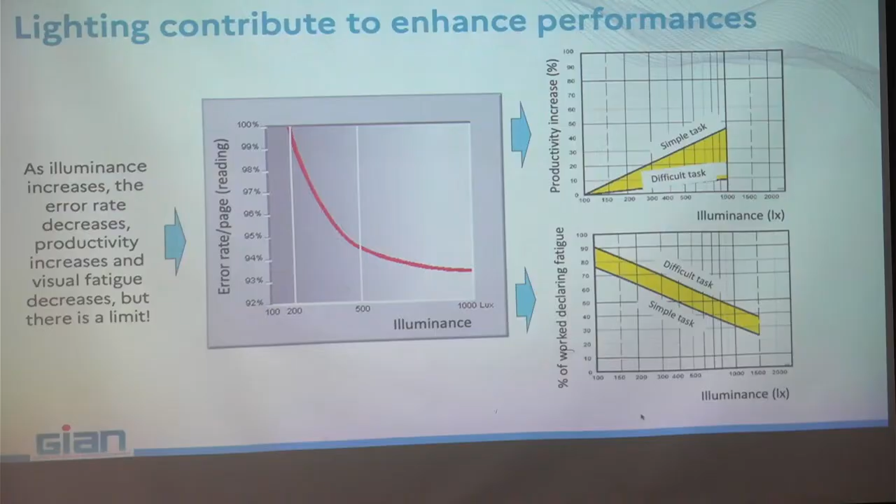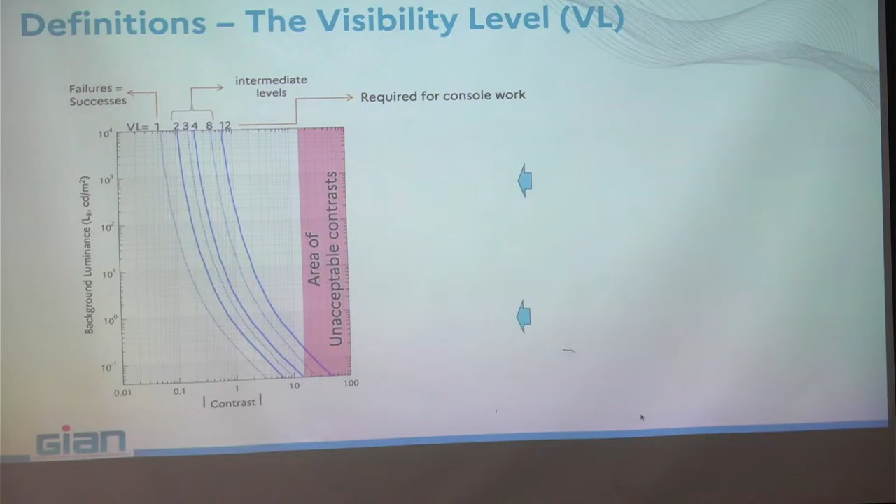And here I will explain something that most probably all of you know, but in an experimental way. To explain our visual performance, we have a metric which is the visibility level, VL, and this visibility level has been studied by the CIE, the International Commission on Illumination, and they define 12 visibility levels from 1 to 12. When you are in visibility level 1, what is your task? For every trial, you have a 50% failure rate. Of two trials, one is false. Okay? This is the real minimum.

And 12 is a very high level. The error rate is very small, less than 1%. And this one, level 12, is required when you are working with a computer or with screens. You will understand why. And you see that these levels depend on the contrast and the background luminance. Okay? It is globally not advised to have a contrast higher than 10. This is logarithmic. If you have contrast higher than 10, then all the objects with that contrast will be dominant. You will see only that.

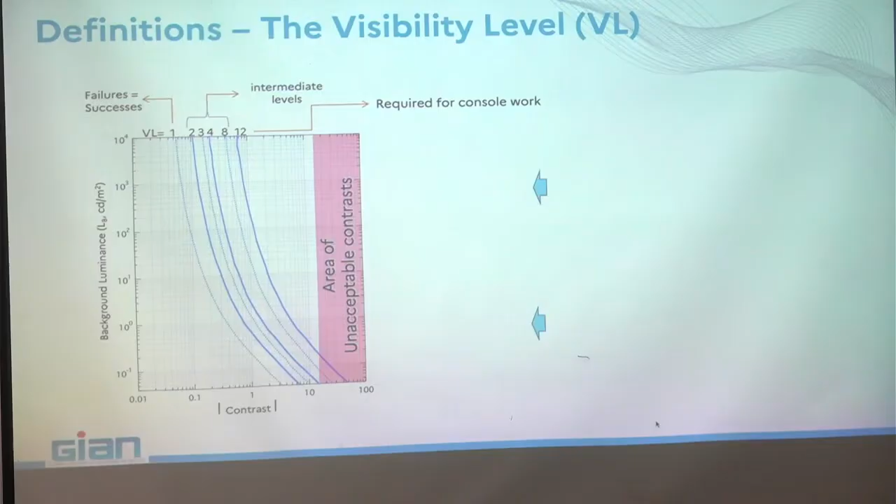Here, the screen is rather bright, but is not so bright as to be dominant. But if I look at the lamp, here the contrast between the lamp and the roof makes the lamp dominant. My eye will look automatically at the lamp, not the roof.

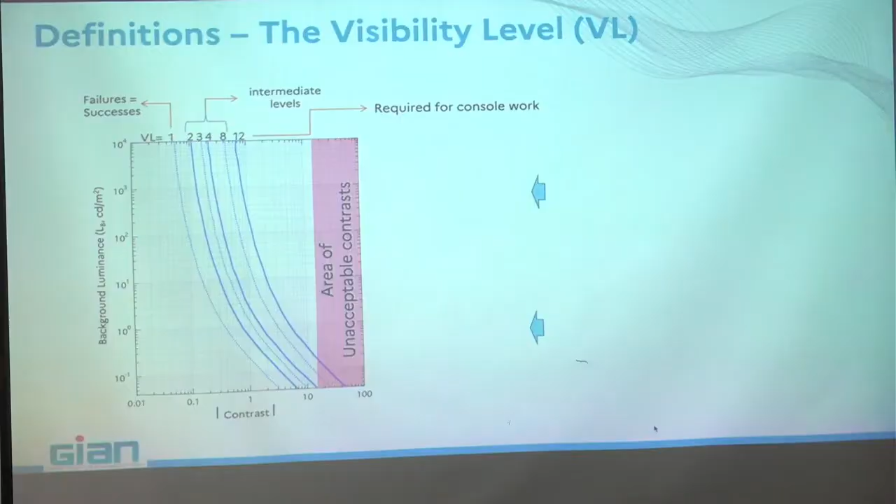And now look here, when you are performing a task, there are two options. One is that one, passive visual task. That means you read a book, for example, and what happens in the book, what is the contrast? The contrast is the printed characters with a given ink on top of a paper with a given reflection coefficient. That means the reflection coefficient of the detail and the paper is fixed by the manufacturer, not by you. That means the contrast is fixed whatever the illuminance or luminance level. Okay? And look here what happens. For this task, the contrast is fixed.

For any luminance, that means what? If you are in a very bad reading condition, say you are somewhere here, reading at a visibility level less than 1, how can you enhance the visibility level? You just light up your book more. You know that effect.

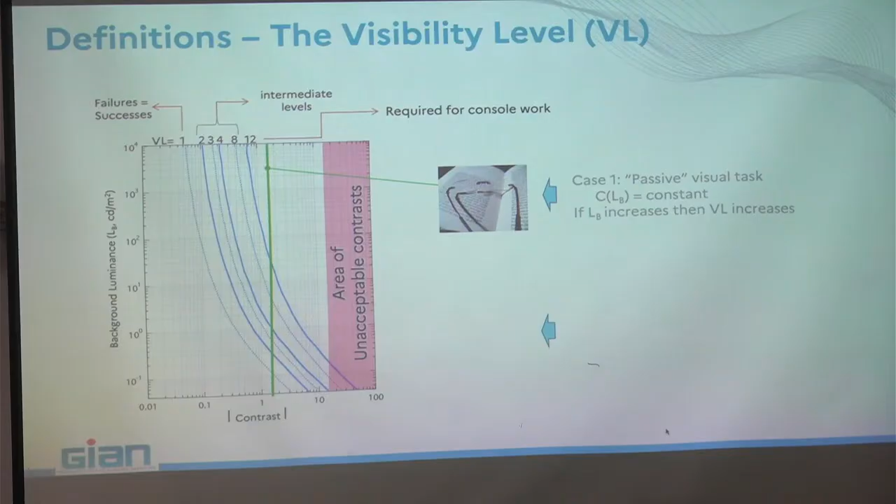All of us, when we were young kids and had to go to bed early and wanted to continue reading our book, or whatever kids usually do, continued reading without light. And then you heard your mother saying, don't read in the dark because you will damage your eyes. You will not damage your eyes, but you will create additional fatigue for your eyes.

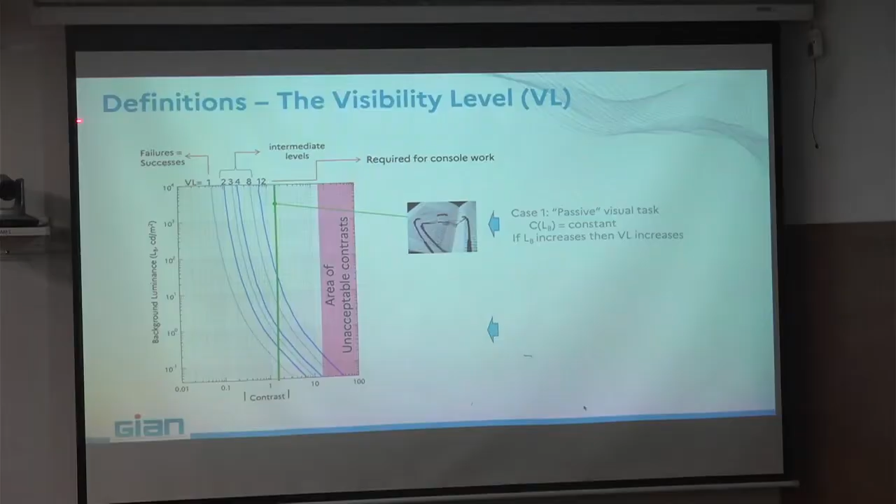And you also know this phenomenon when you arrive at my age and you go to a nice romantic restaurant that is illuminated with candles. You don't have enough light to read the menu, especially if the menu doesn't have good contrast. And what all people do is take our mobile phone, switch on the light, and then you can read. You don't need glasses. Just because the contrast is constant, and if you overlight, you increase the visibility level. This is very simple. But it's not necessary to go beyond 12. Beyond 12, you don't gain anything else.

A second kind of task is what we call an active task. You are working with something that produces its own light. This is the case of your mobile phone, the GPS, your screen, and so on. And these kinds of devices have that behavior: when you increase the light coming onto a screen, you decrease the contrast. You destroy the contrast.

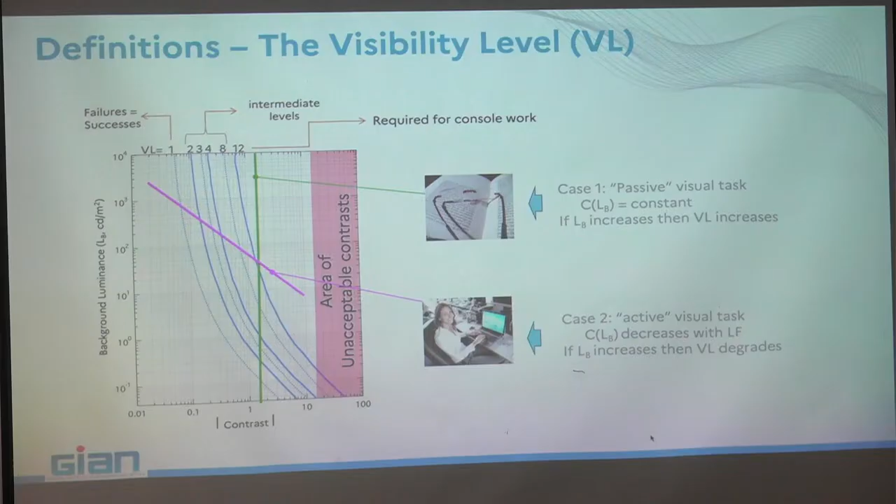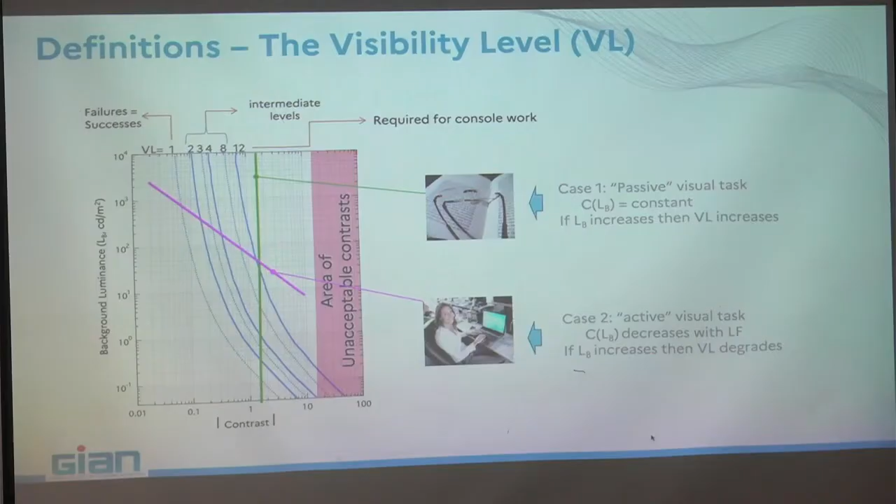And that means what? If you have a very old computer or an old device with a very degraded screen and you don't see very well what is written on the screen, then don't overlight the computer. On the contrary, you have to put something to cut the parasitic light in order to pass from low levels to high levels. You have to cut the parasitic light. You have to put the computer in the dark.

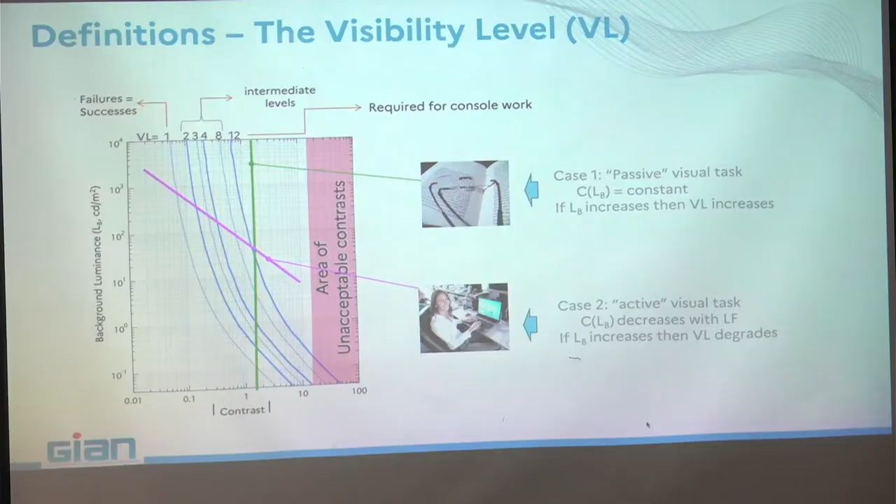And all of us like watching TV in a dark space, because the contrast is higher. But if you do that, your eyes, as the TV is dominant, will fix on the TV, and your muscles here will get fatigued because you don't move your head enough. And some TV set manufacturers propose screens with a little ambient light behind the screen in order to light up the space a little, which allows you to look all around, and you reduce fatigue, but you keep the contrast as high as possible.

If you go to the cinema, you are also in a dark room. It's unusual that films are more than 2 hours, in order to reduce fatigue. On the other hand, the screen is huge and you are very close to the screen. In any case, you have to move your head, okay?

Now from the visibility level, how can you define a visual performance rate? This is very difficult. In fact, the visual performance rate is defined as the product of the accuracy with which you execute a task, if you read a text, how many words you miss or misspell per line or per page, or if you are screwing screws, how many screws you don't do correctly, how many errors you make, and the speed of execution, how much time you need to read a page with a given number of errors. The visual performance is the product of the two. In fact, the more performant you are, the faster you go with fewer errors.

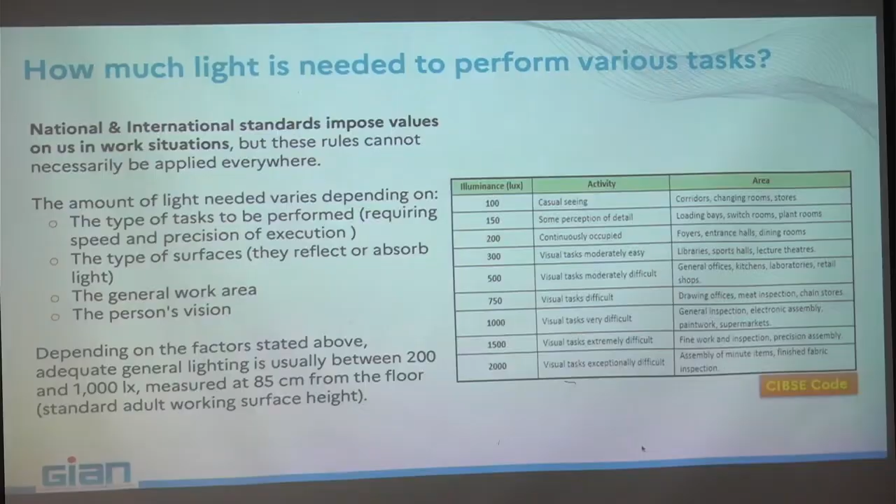How much light is needed to perform various tasks? Here, there are a lot of works since 1900, since the existence of the International Commission of Illumination, CIE. They are working on that. And you have thousands of papers from more than 100 years now, dealing with different experiments, different models, different assumptions, and we have so much experience today that we are able to say, for example, if I want to have something that is well visible in corridors, changing rooms, in store, where I used to have casual seeing,

100 lux is enough. If I have a visual task with moderate difficulty, like general office, kitchens, laboratories, retail shops, 500 lux is enough. And if I have an exceptionally difficult task, like assembly of very small items, finishing work for your watches and things like that, then maybe I need 2000 lux. We have now tables like that, they are internationally accepted,

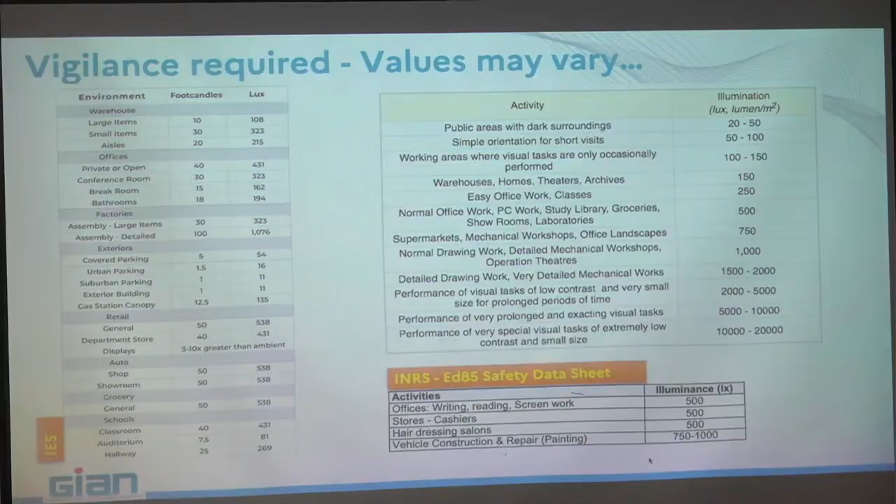Well, okay, I show you some generally accepted values, but be vigilant, because if you take different recommendations, this is from the Illuminating Engineering Society of North America, this is a French Institute for Working Security, this is, I forgot to put which organism it is, you can find for the same task different values. Not very different, but you can find different values. Which one do you have to take? Any of those.

It's better to take the values that are generally accepted in your country, because if there are differences between the European and American or European and Asian recommendations, there may be some reasons, some fine-tuning. But in any case, it's very rare to find more than 100 to 150 lux difference for the same task. Okay. In the US, you will always find higher values because they want to show that they are richer than the others, but they don't really need it always.

Be careful also, we are speaking in lux. The only country speaking in another unit is the US. They are speaking in foot candles. Lux is lumen per square meter. The other is lumen per square foot, and they call that foot candle. Okay, this can be confusing, and globally, 1 foot candle is equal to 10 lux. Okay.

Then you have also to look, okay, I have the recommendations, but in some cases, like in France, for example, legal constraints may apply. In France, the workspace legislation, the law for working people and working areas, includes a section concerning lighting. And that section, you have here the name of the articles of the law. It tells you that you have to avoid, of course, to kill people or to harm people. You have to avoid any nuisance in the space. And they give you some values here, which are very low.

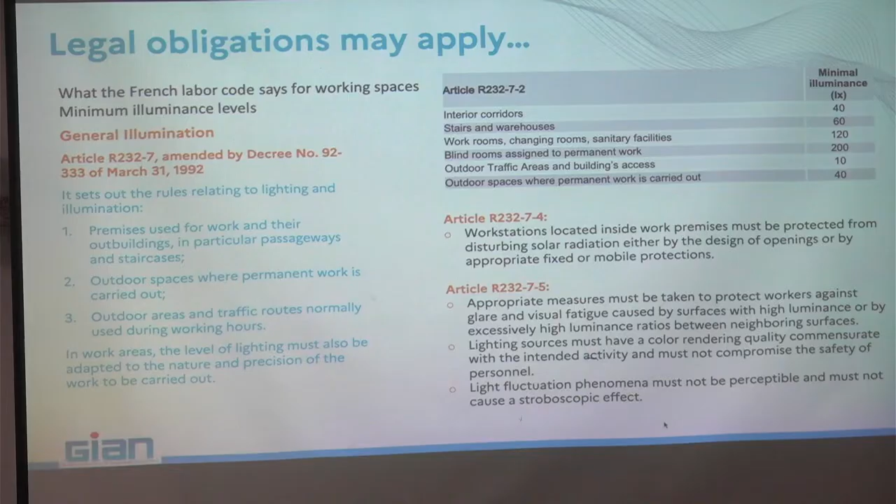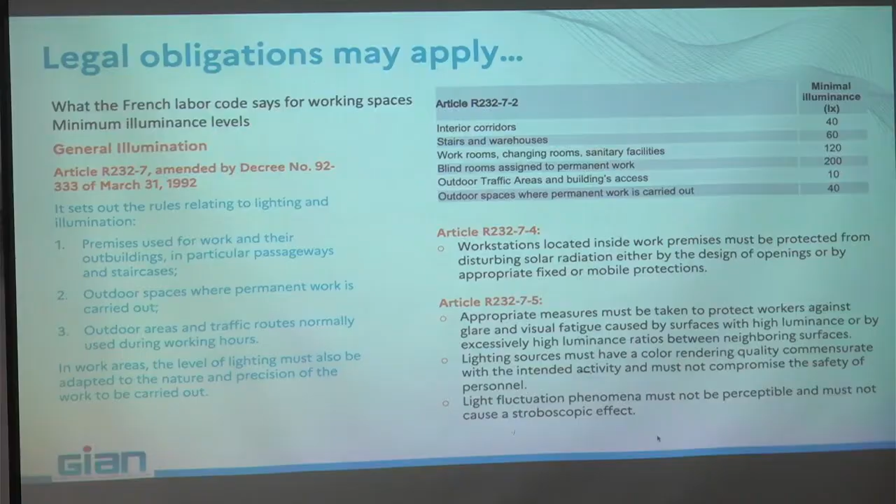For example, look, for corridors, 40 lux. The recommendation before was telling 100 lux. Here the recommendation was telling 100. Yes, but this one is the lowest value. If in a working space you have less than that, for example, if in the working rooms you have less than 120 lux, even if the recommendation is around 300, what may happen here?

If one of the employees complains, then there are what we call the work doctors, work medicine. They are mandated by the authorities. They can come. They will make measurements, and if they find that the room is less than 120 lux, they will give a fine and will impose the rectification of the system within a couple of months. They will come back in a couple of months, and if the rectification is not made, they can completely close the space, forbid the use of the space.

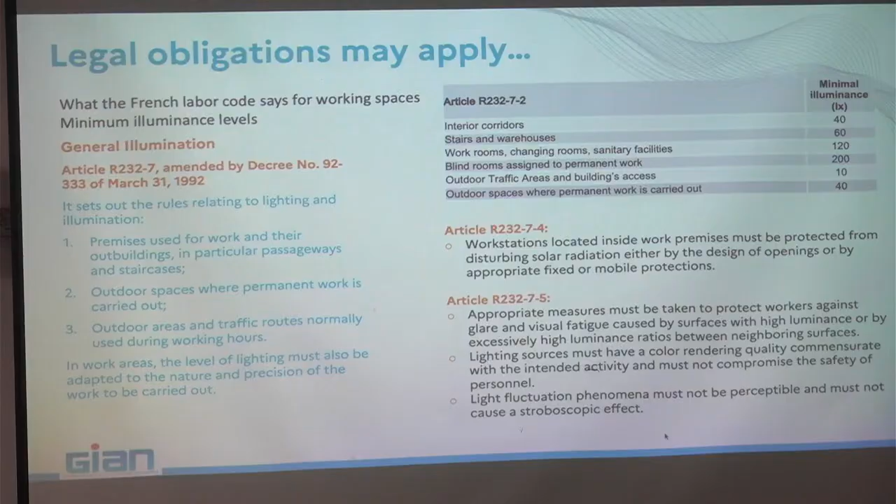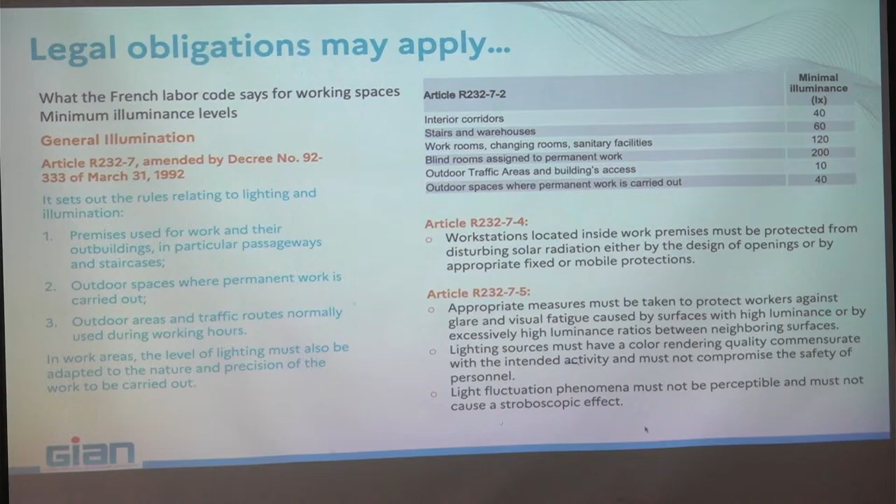Well, fortunately these values are really low, but you don't have to go lower than that. If you use those values, you will not see anything, believe me.

Also, this is a French concept, which is unique. I don't see that anywhere else, but it is very interesting because in France we have what we call a standard with an X. Standard X means experimental, which is not transposed to a supranational level and stays valid only for France. This standard goes in addition to the European and French standard for interior lighting, the EN 12464. For example, this experimental standard tells you how much light you need in reality.

For example, say that we are in the case of a space where I need 150 lux following the European standard, okay? Now, following the French NF X 35-103, I have to ask 5 questions. First question, errors in perception may have dangerous or costly impact. If you answer yes, then you increase by 50 lux. You pass from 150 to 200.

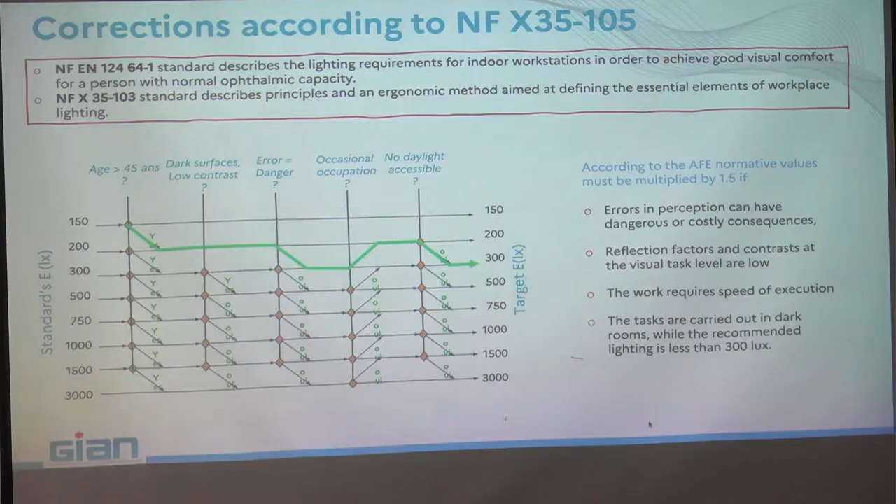The first question is, do you have workers with more than 45 years inside? And here we speak only of the workers, not the visitors. If you are in a university, the clients are less than 45 years usually, but the worker is me, and usually we are more than 45 years, at least a large part of us. The permanent staff prevails over the non-permanent.

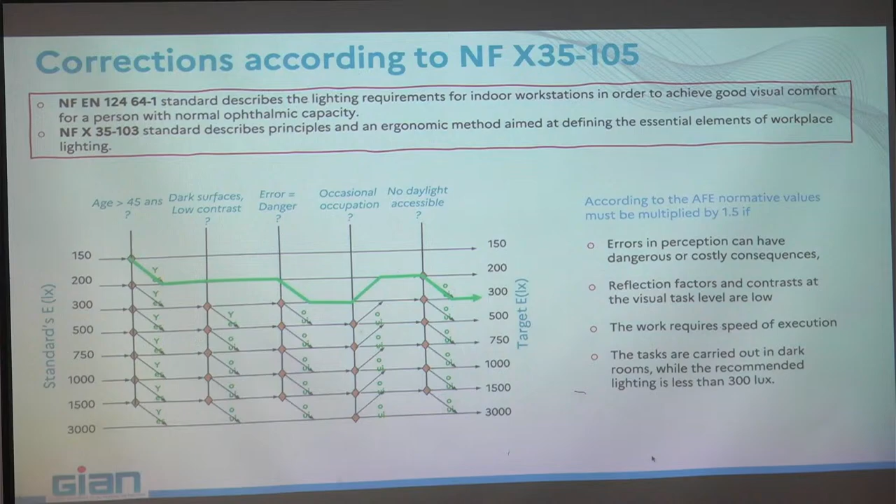And here goes the question: error equals danger. If you don't see a drill and you put your hand there, you will drill your hand. This is problematic. If yes, you increase. And then you have a single question that allows you to go lower. Is the work performed in that room occasional? If you just go to a storage space to put something or get something from the archives, then you can reduce the illuminance by 50 lux or something like that. You start here from 150, and if you look at those answers, finally you have to put 300 lux.

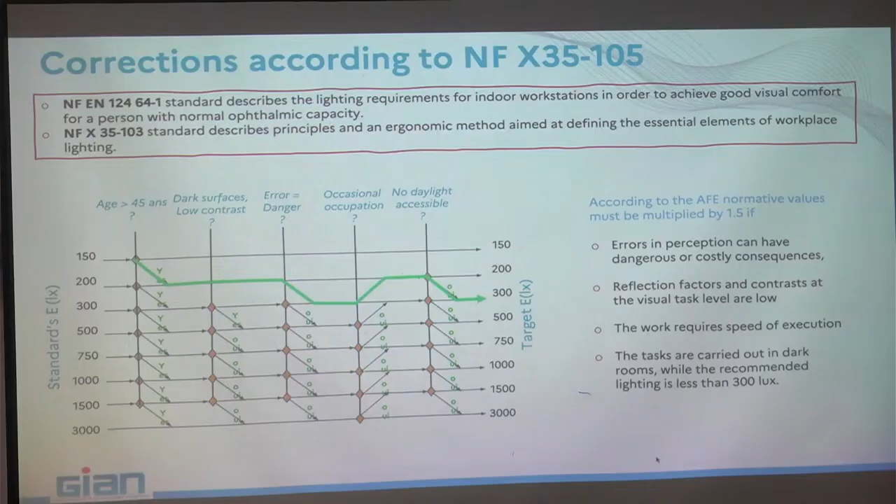Another point which is very important, I told you that, is the uniformity of the illuminance in the space. The uniformity is defined as the ratio of the minimum illuminance divided by the average. The minimum should be somewhere there. And in many cases, they tell you that this uniformity has to stay higher than 80%. That is no more than 20% less light there than the average of the room.

And this can be problematic because if this is written in some rules, that means in that conference room, if I want to respect the uniformity, I have to switch on the lights there, and I don't need it. Fortunately, the new European standard says that you can define the working zone. Then I can define that the working zone is here, and I look at the uniformity in that area. I don't take care of that part which is not used at that moment.

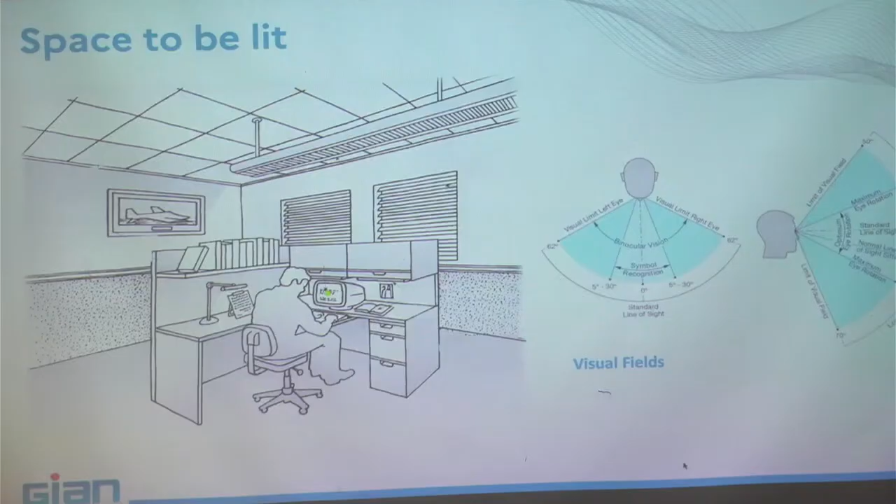What is the space to be lit? I remind you again of the different visual fields. When you look at this person here working on his antiquated computer, we don't care about that. You have a small spot there. This spot is what we call the foveal zone, just in the line of sight of our eye. This is the area where you can best see colors, remember that, and where you can best see the smallest elements.

Then you have a second area, which we call the attentive watch, which is around 15 degrees. That is that one, something like that. And this is the area where you can see a space without moving your eyes or your head. If you take your mobile phone and put it at 20 centimeters, this corresponds almost exactly to your attentive watch space. You don't need to move your head or your eyes to see what is in the telephone.

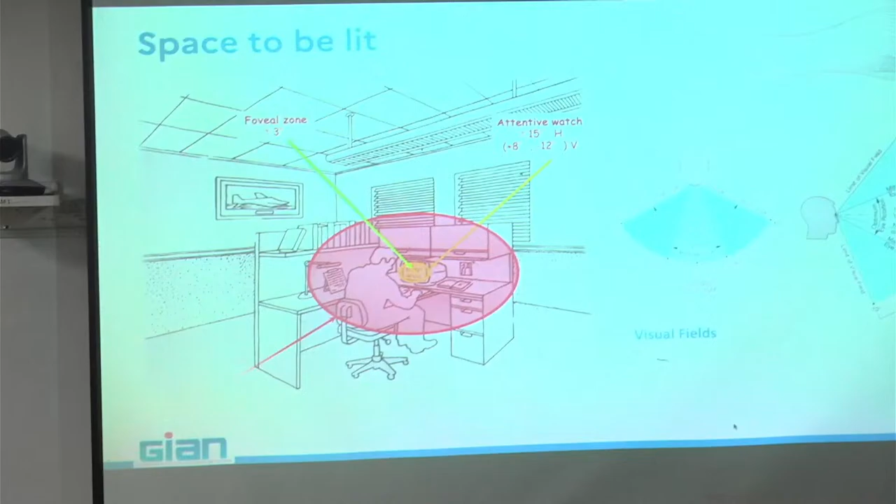Now, if you take a screen of, I don't know, 40-inch diagonal for your computer, and you have it at 20 centimeters, you have to move your head continuously. Then you have the induced impression area, plus or minus 50 degrees. That means you are really in the central vision part where you have binocular vision, and in that case, how you put your elements on your desktop is very important for your performance, but this is something that no one can tell you how to do. You organize your space as you want, but you organize your space in order to be more efficient.

And finally, you have a fourth space, which is the side vision, the peripheral vision. Here, in fact, when I'm here, I don't really care about what is around, but I know that there is a door here, there is a window there, and who knows, maybe one of the Hindu mythology monsters can attack me, or if I am in Nepal, a Yeti may arrive, and I am in danger. That means I want to have some light here in order to be able, if something is moving there, to look at who it is and what it wants from me. Okay.

Well, then if you take that, and let's go back to our office, then you have two real spaces. One space that we call the ergorama, which is the place where you execute your visual task. Ergo in Greek means work. And here you need to ensure that your visual performance is highest for your task, and also you need to eliminate any nuisance. What does nuisance mean? Any reflection, any glare, dazzling, or whatever else in that space.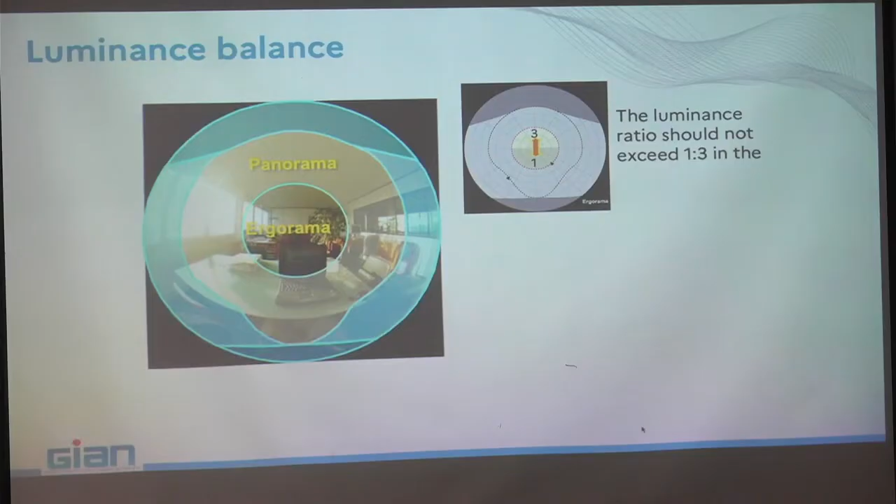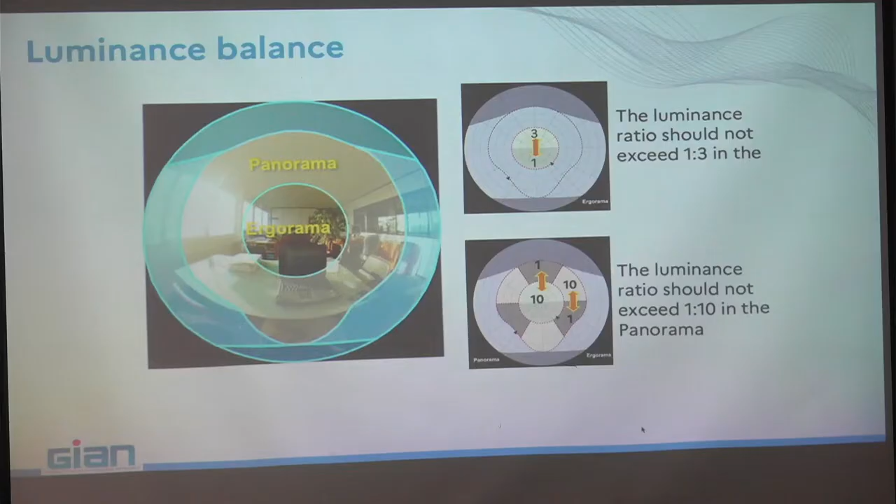And then you have those two spaces, but those two spaces are not disconnected. You have to take into account the liaisons between the two spaces in order to ensure a luminance balance between them, and also the compatibility between the two spaces. If one is very bright and the other is very dark, it could be problematic. There is an example. This is a photo now. And in fact, what is recommended is that inside the ergorama you never have a contrast ratio higher than 3. Objects inside your working space should not be more than 3 times brighter than others. And now, if you take the panorama, then the luminance ratio, the contrast between ergorama and panorama, should not go higher than 10, and also inside the panorama the luminance ratio cannot go higher than 10, because once again you have a single object that becomes predominant, and you see only that. Your eye is attracted to the brighter object.

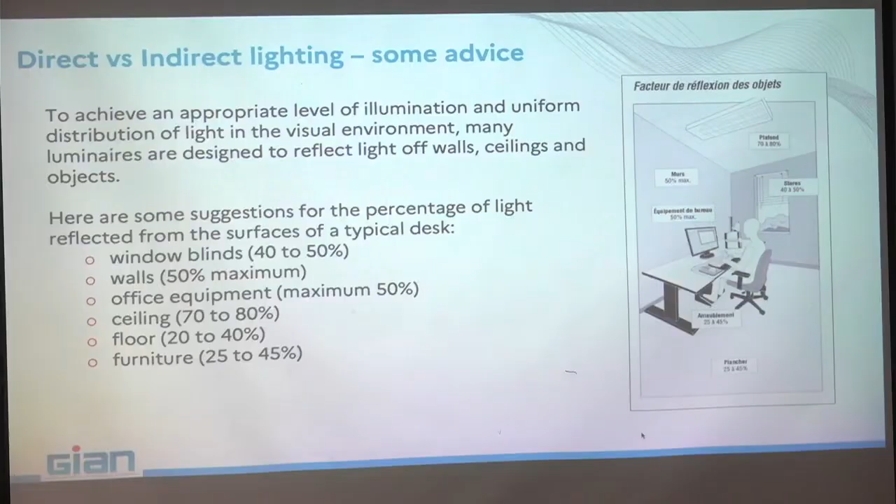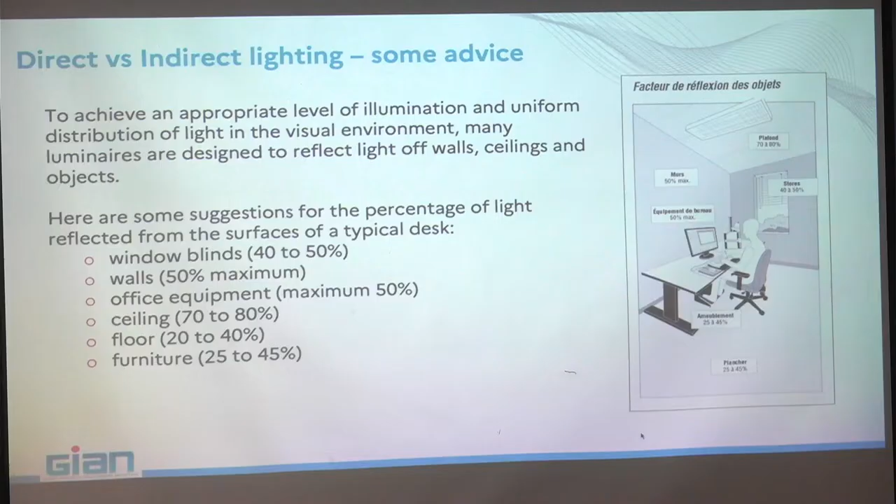Yes, this is some advice on where the light is coming from, direct from above or indirect. This is the result of what I showed you before. And then you can find here some recommendations about how much light you expect to get in optimal conditions for your working space here: light coming from windows, from the ceiling, from the furniture, from reflections and things like that.

A second very important effect, which is a nuisance that reduces your visual capacity and also your visual performance, is glare. When you are dazzled due to different causes, you lose visual acuity, and you can also be in a very dangerous situation. You know that when you drive and a car is coming the other way with high beams, you don't really like it, because you are dazzled and you don't really see what happens around you.

Well, glare results from viewing conditions in which one experience is different from another, and in fact it's very difficult to measure glare because it is a sensation. It's not a measurable phenomenon like a current or a temperature. Glare you cannot measure. It's something that is a feeling. You feel glare, and it's very difficult to understand what the feeling is for each one.

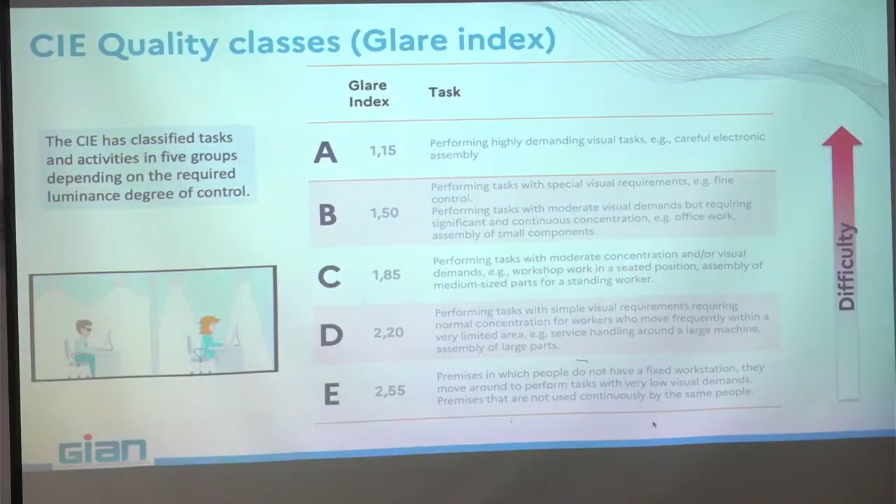How can we quantify it? We cannot measure glare, but we can quantify glare. And we can quantify it, thanks to the work of CIE once more, using what we call the glare index. This glare index is given here and defines a number of classes. And these classes are linked to the difficulty of the task that we need to execute. And you will see how you use that.

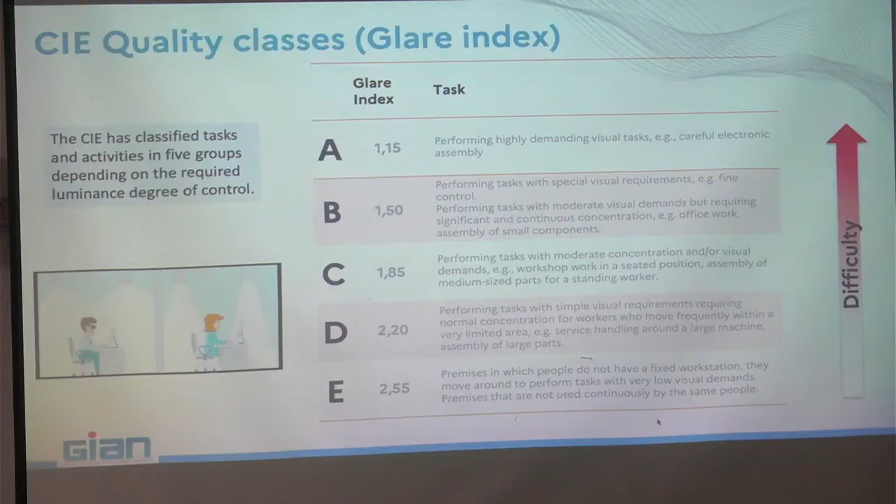For example, if we are in premises in which people do not have a fixed workstation, they move around, they perform tasks with very low visual demands, for example in a library or in a store area, you have glare class E. But if you go to highly demanding visual tasks, like careful electronic assembly, you are in premises that need glare index A. And I will show you how we will use that.

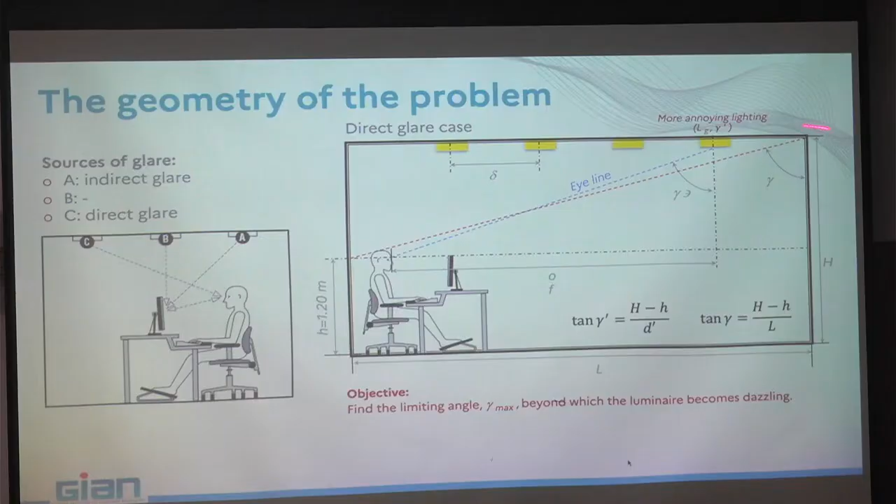And if you assume that your eyes are just at the wall and the source is just in the corner here, then you ask, what is the angle gamma here, above which I must not have any fixture present? This is the problem to solve: how can I calculate that angle in order to be sure that none of those fixtures here are glaring.

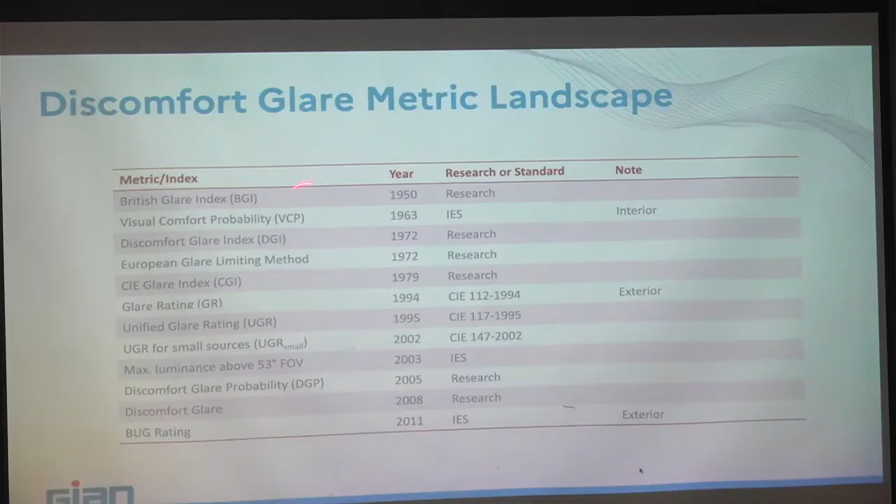Yes, maybe I have to reorganize my slides somehow, but okay. These are some metrics given by different organisms. I can go fast. And this is the more interesting one for us.

This is the way that you can find the maximum angle beyond which you don't have to put any fixture. When you take the catalog from the luminaire manufacturer, they give you, of course, these graphics, the polar plot, but they also give you that graphic that we call the Bodmann and Söllner abacus, and you see here this is coming from the manufacturer.

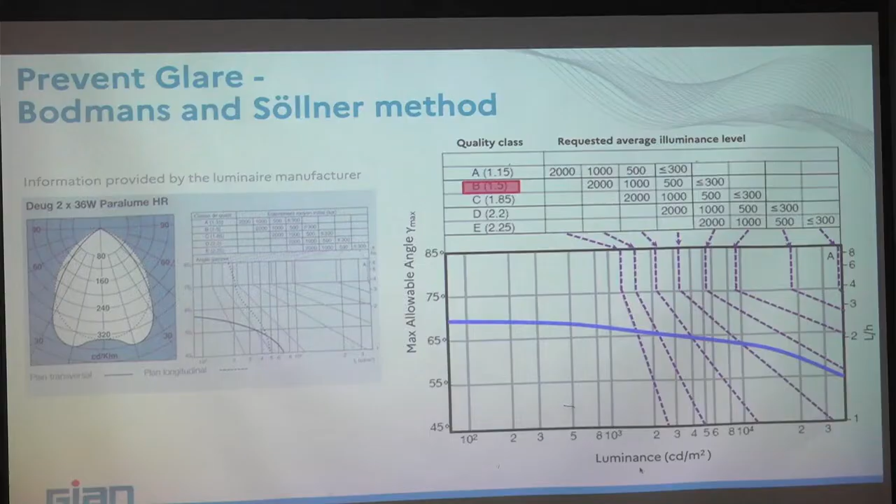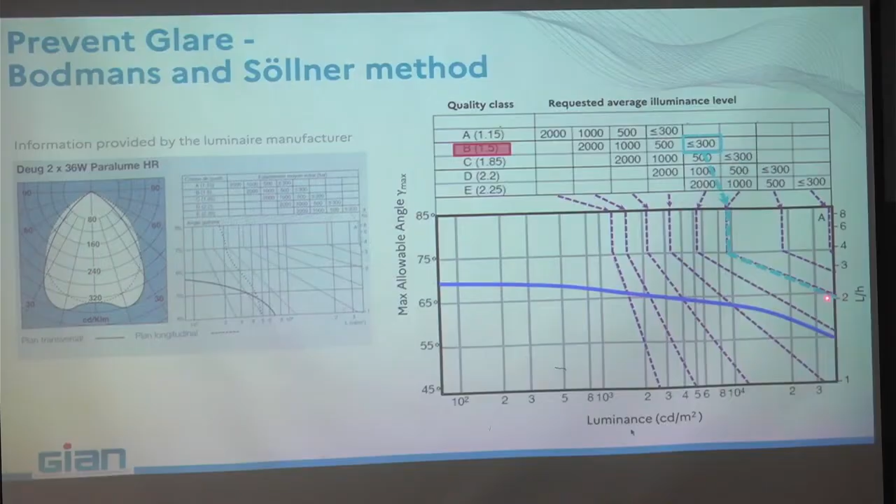How do you use this abacus? You say, for example, there is the behavior of my fixture, bought from that manufacturer. I will put this fixture in a room where I have glare class B, because I'm performing a rather difficult task, and the regulations tell me that for my room I need 300 lux. Then I follow that line here, and if the blue line is below that one, no problem. I can put as many fixtures as I want. They will never be glaring.

But now, if for the same glare class B the rules tell me that I need 500 lux and not 300, look, if I follow that line, oops, here I have a part of the blue curve which is above the limit, and here at the intersection I can find the famous angle and say above that angle, above 60 to 65 degrees, I should not put any of those fixtures.

If I take another fixture with a different curve, maybe I can do it, but if I select those fixtures and I'm in that situation, fixtures that are 65 degrees and higher from my line of sight are glaring.

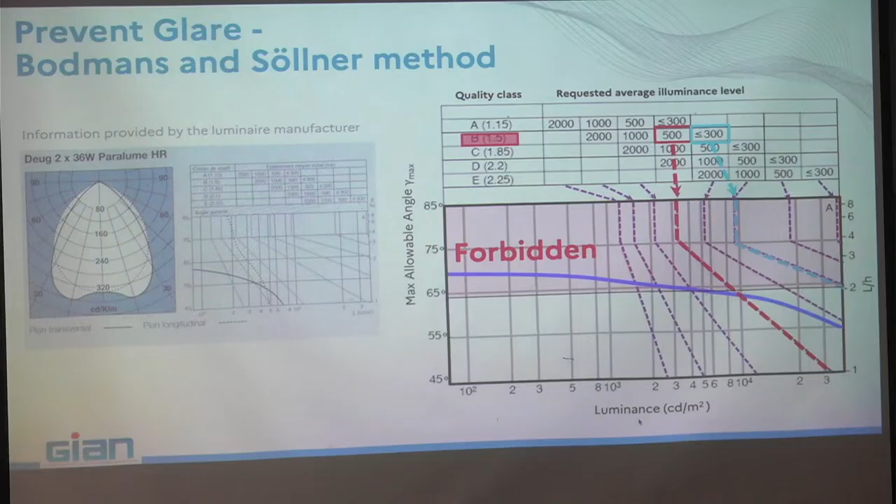Another interesting effect: the shade, the correlated color temperature. If I show you that picture here, you will tell me this is a warm space because I use warm colors, because the fixtures produce warm white light, 2700 kelvins, and the regulations tell me for an office space like that one I need 300 lux on the working area. Okay.

Now, if I show you that one, you tell me, wow, this is a cool or cold atmosphere. I produce high CCT light, cold white or neutral white. And here the legislation and the regulation tell me I need 300 lux. But if I put 300 lux, all of the workers there will complain that they don't have enough light. And then you start to increase the illuminance level a little bit, and to get the same satisfaction rate you have to go to 800 lux, which is almost 3 times more than what the regulation is requiring.

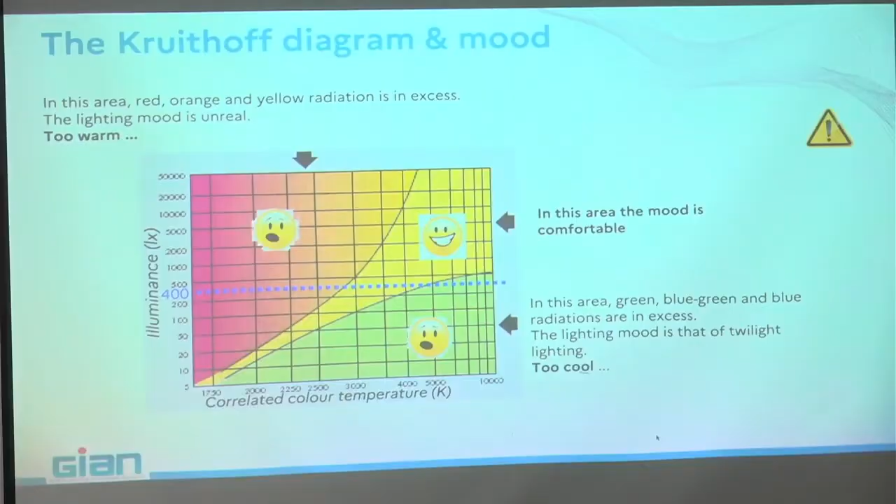Say, for example, I am in a room where I need 400 lux, the office that I showed you before. How can I achieve 400 lux? I have different technologies. If I'm a little bit crazy, I can do it with candles. Candles have a very low correlated color temperature, and to achieve 400 lux you will need thousands of candles, but in that case, even in reality, it is hot, not acceptable.

I can do it with warm white LEDs, or I can do it with cold white LEDs. The result will be the same, 400 lux, but here the workers are not satisfied, there the people are okay. In that situation it's better to use warm white. And just a reminder, the cooler the atmosphere, the more light is needed to be satisfied.

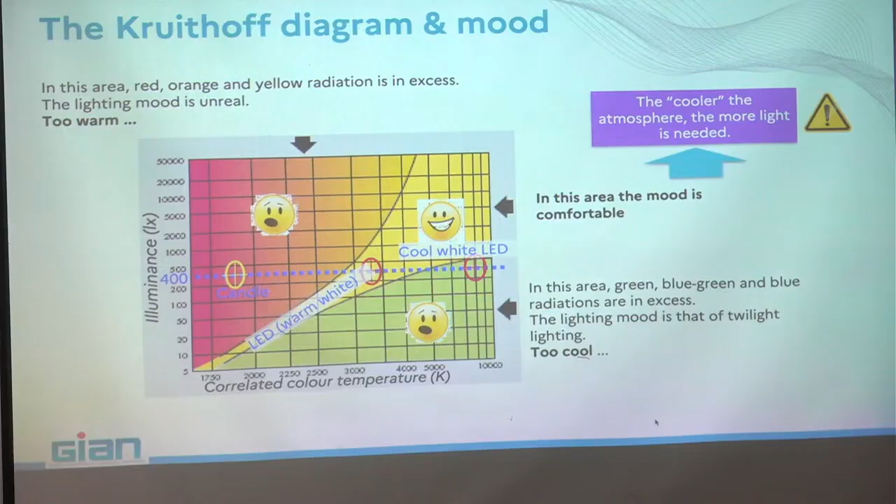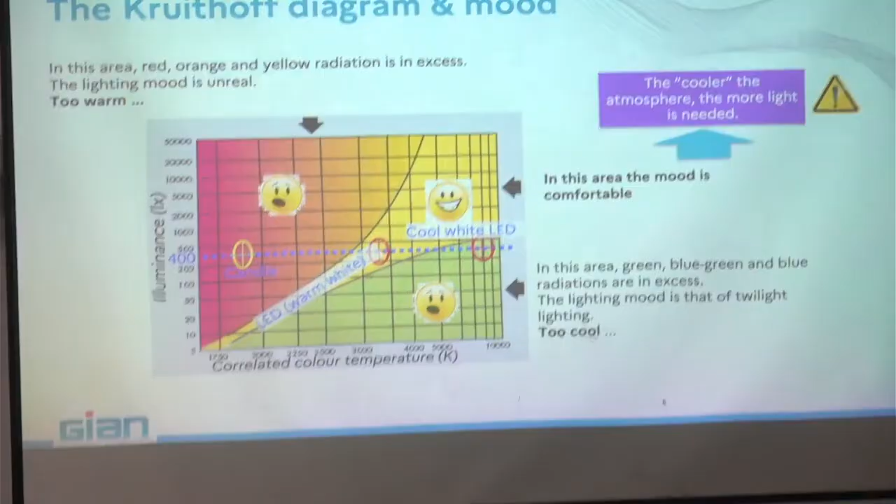Why that? Because human beings have a very intimate relation with light variation. I will discuss that, and then we break for today. We continue tomorrow morning. Well, what is our relation with light? Not only with the light, but especially with the variation of the light within the day. We can also discuss the seasons, but inside the day, what happens when you have sunrise

due to the diffusion characteristics of our atmosphere: you have low light with shadows, non-uniform lighting, and also warm light, yellow, reddish. When you arrive at zenith, the sky is blue, I'm speaking of a non-overcast sky. In that case, you have fewer shadows because the light comes from above. You have a larger quantity of light and much colder light.

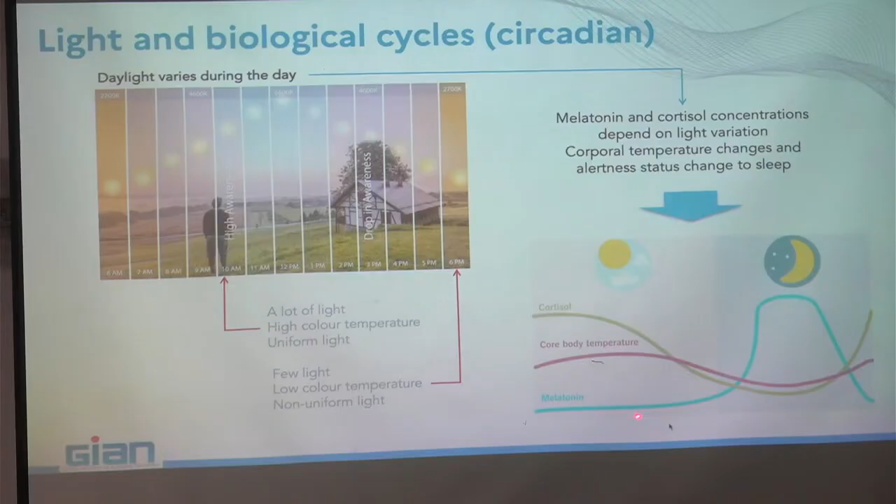And when the sun starts going down, same thing, you have more shadows. That means less uniformity, lower light levels, and lower correlated color temperature. In fact, this variation of light in 24 hours directly affects the production of some hormones inside our body. For example, at midday the melatonin secretion in our brain is almost zero, and melatonin is the hormone linked to sleepiness.

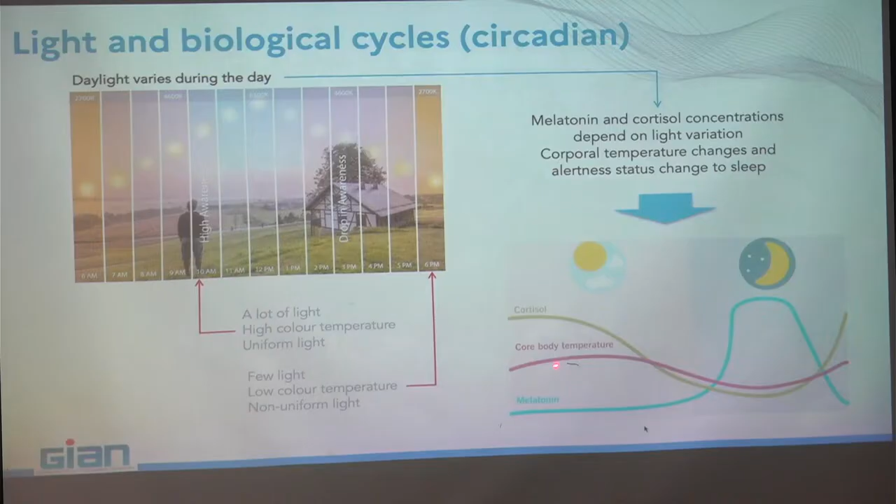On the opposite, when melatonin is suppressed, another one is emitted, which is cortisol, the hormone that makes us alert. This is also linked with our body temperature. Here our body temperature is the normal one, around 36 something. And when the sun starts to go down, our eyes say, okay, it's time to prepare for sleep. Melatonin production increases, cortisol decreases, our body temperature decreases, and we want to go to sleep.

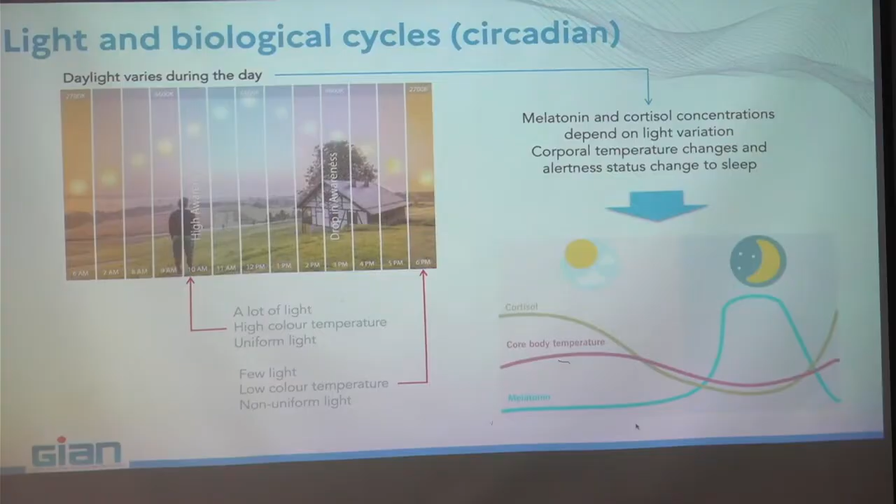What does that mean? This is our normal rhythm. It means if you have artificial lighting systems and you use lamps with different color temperatures, if you are exposed for more than a few minutes, you can directly affect the production of melatonin and cortisol, and in that case you can disrupt your circadian rhythm. You can force yourself to stay awake, or go to sleep when you have to stay awake.

That means when our eye detects the sun going down, it gives the order to the brain to pilot the pineal gland to produce sleeping hormones. A few years ago with incandescent lamps, any kind of lamp was warm white, and warm white doesn't influence you at night when you are exposed to that light. But now you go to the supermarket and buy cold white lamps because you feel better given the outside temperature, and you put this cold white light near your bed and use it for half an hour or so.

What will happen? The bluish light from that lamp will suppress the melatonin instead of letting it increase, and it will be very difficult for you to sleep. You will try to sleep, you may or may not manage, and the next day you will wake up tired, with headaches. That phenomenon is not a problem of electromagnetic radiation coming from the lamps and their drivers, but a lighting problem. Yes, you selected the wrong light.

On the opposite, if you take a very cold white light and you put it under your shower in the morning, taking your shower for 10 minutes under that light is the equivalent of 2 cups of coffee. Caffeine has exactly the same effect as cold light in the production of cortisol and suppression of melatonin.

That means you have to understand better how the lighting system works, because some years ago this kind of problem didn't exist. In this room here, I don't have an interest in putting a warm white light because you are almost inactive, you take notes, you are looking at me, you are looking at the screen, and somehow you may want to sleep. If I add warm light, I can guarantee that a certain percentage of people will sleep inside the conference room.